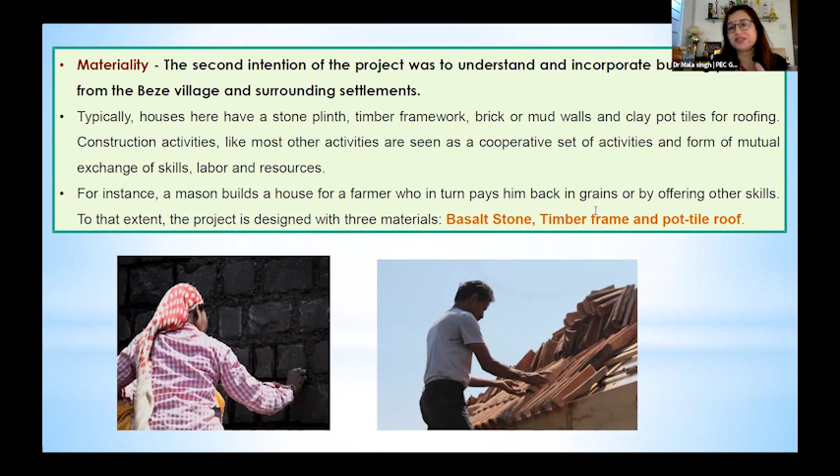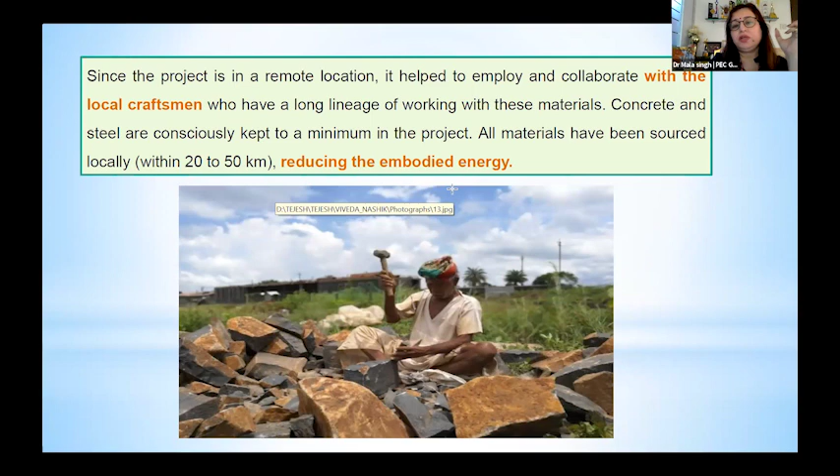Now the very striking feature of this project is that local craftsmen from the neighborhood villages were part of it, and concrete and steel were kept minimal, with mostly local products used in the construction of this property.

This entire stonework was mainly carried out by the Vadari community in that area, whose rural economy depends on this trade. They have stone measurement experts, and these people were given the opportunity to build this project and to supply the basalt stone materials as well.

This is what the sustainability concept is about: self-sufficiency. When you buy local and give opportunity to local people, it makes the project more monolithic in character, since the material used is monolithic itself and inspired by ancient heritage structures.

As one of the earlier speakers mentioned upcycled wood, the same concept was used in constructing this resort. Two kinds of wood were applied: one was upcycled wood, and the other was Haladu wood, inspired from the Haladi plant, turmeric, primarily used for the roofing system.

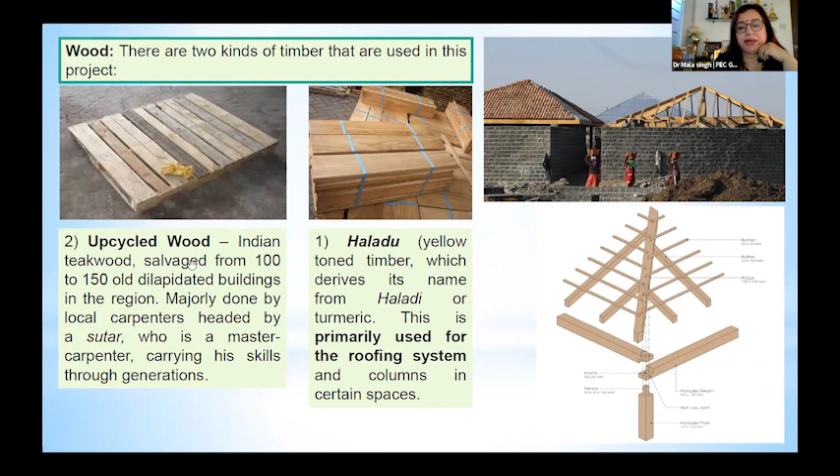The upcycled wood was salvage wood procured through the sutar, the local carpenters who head this trade. These generational skills of the people were used in this project through these two kinds of sustainable wood products.

Looking into the roofing, clay pot tiles were also used in this project. You must have heard of the kumbhar, the potter community, who use traditional methods, and the same strategy was used here.

This was the largest consignment of pot tiles from the kumbhar that this area had ever received, which helped increase the local economy and had a very good social impact. That's also about the sustainability aspect when we talk about the triple bottom line.

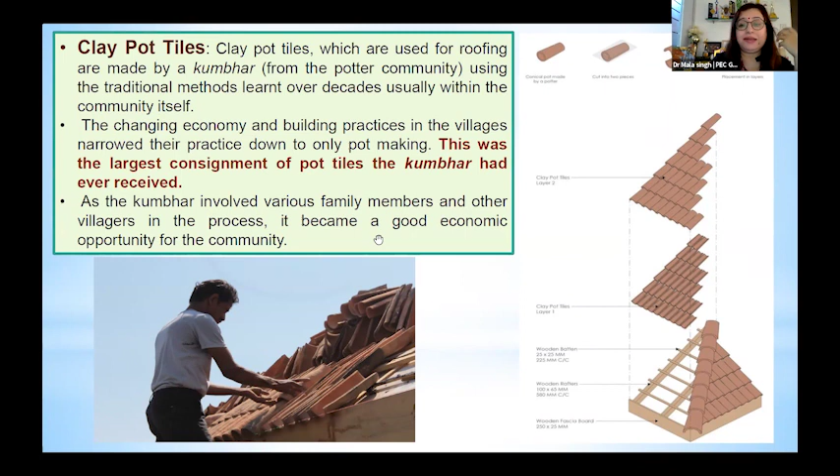Most of the kumbhar and their family members were involved in this entire process, so the project doesn't take care of only the environment and profit, but also the beneficial aspects of the social community, enhancing the local economy as an opportunity for them.

Now looking at the design specialty, it's a beautiful project. If you go there, you'll feel historical, prominent architectural types used in the design, inspired by the landscape of the Sahyadri Hills, since it is located very near them. You can see architectural traces from the Trimbakeshwar temple, and there are traditional wadas nearby that inspired it.

Now these are the real project pictures. When inspired from the wada culture, I'll show you those round clusters. Then kunds, where a lot of water bodies were created in between. Then the chaitya concept, with beautiful and tedious Buddhist caves and monasteries.

You can see in the center a dome for the meditation center. Then the ghats, where you can see a lot of amphitheaters and ghat-like structures, similar to Varanasi and other areas. These are really beautiful spaces, a mind-blowing experience when you go there.

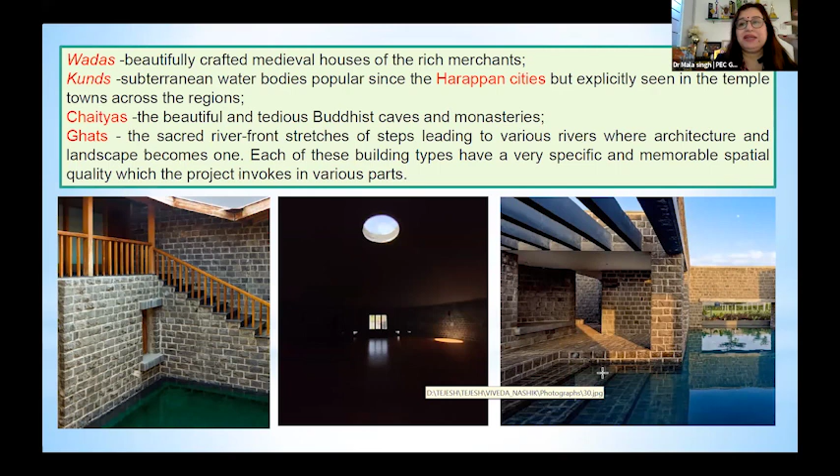Since time is constrained and my presentation is large, I won't dwell too much on the design, but I'd like to address that all the amenities blocks were designed with a five-square concept: the wada and courtyard houses, chaityas, kund, and ghats.

All these naturopathy clusters were placed accordingly: massage rooms in the courtyard houses, yoga and meditation center in the chaityas with the round dome I showed, swimming pools and other water bodies at the kund concept, and the amphitheater and restaurant as the ghats.

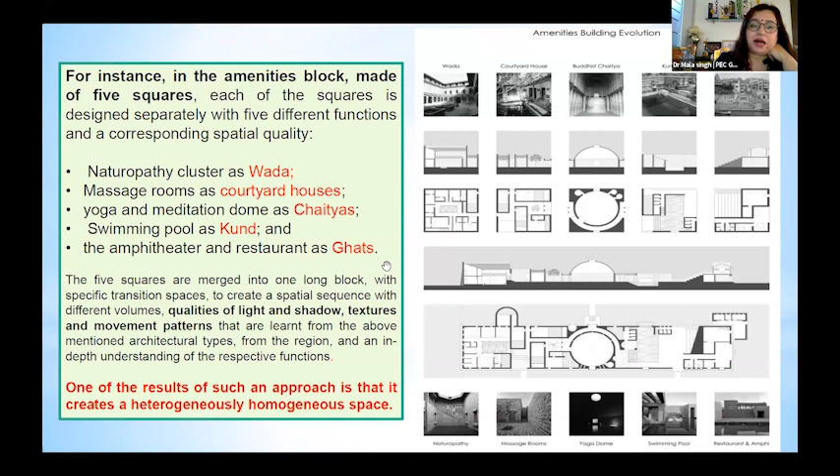This is the cluster I was talking about, mainly the guest rooms, conceived as clusters resembling a small settlement. Every cluster has a central courtyard, and you can see in the actual picture there is a tree.

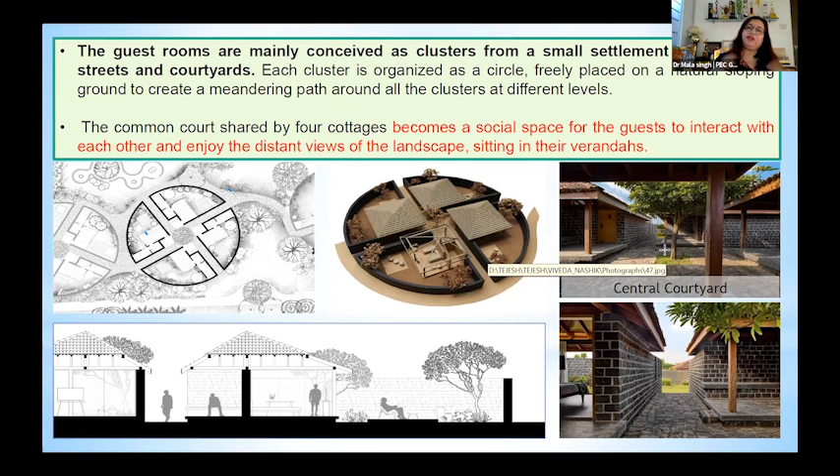If you see this particular setup, when any guest comes here and stays, he has his individual courtyard. Even this cluster also has its own individual courtyard. This is a very good community space which makes you interactive, and this gives you the inspiration of our village and local cultural values.

Now coming to the monolithic character, because we know that monolithic characters help give better views, to look into the sky, get green color views, and look into the landscape and scenic values of the project. This is what the monolithic character is helping in this project as well, just like our old forts.

If you see those 4 clusters I was talking about, these are the recreational areas where the roofing is basically pyramid shape with clay tiles. You can see the complete section, and local bamboos and clay tiles, how they were put here with a natural, personal roof garden.

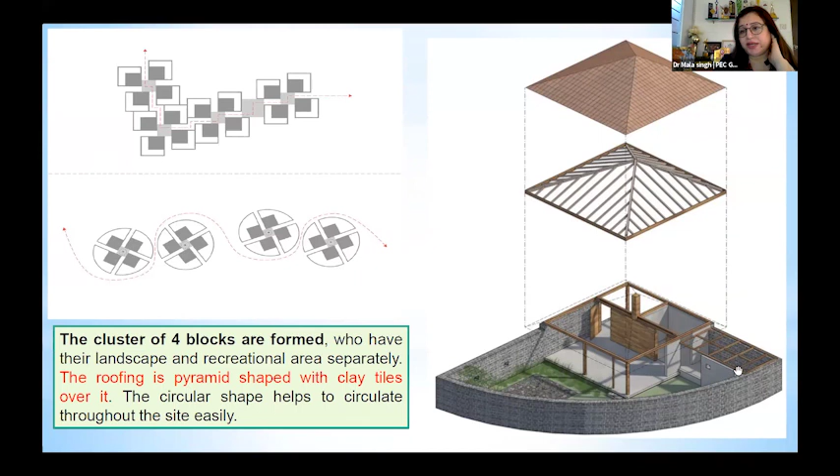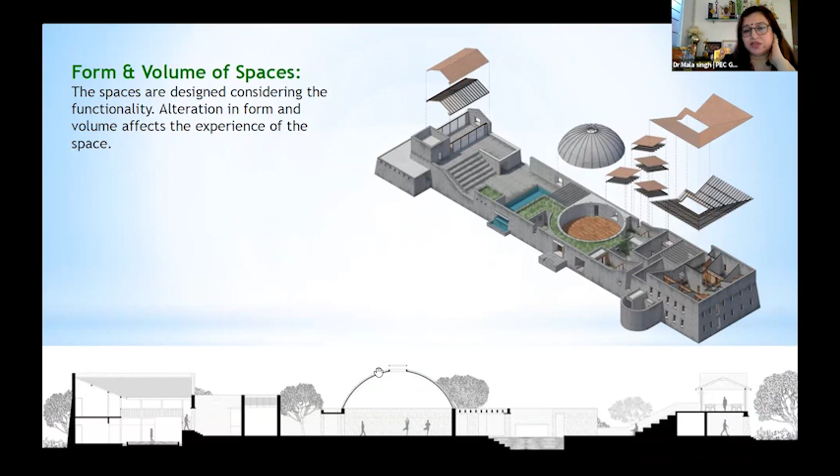And this is a toilet. We are trying to show here how the utilization of forms and volume of the spaces were utilized. You can see the section here. This is a dome, and this is how the spaces were utilized so efficiently here.

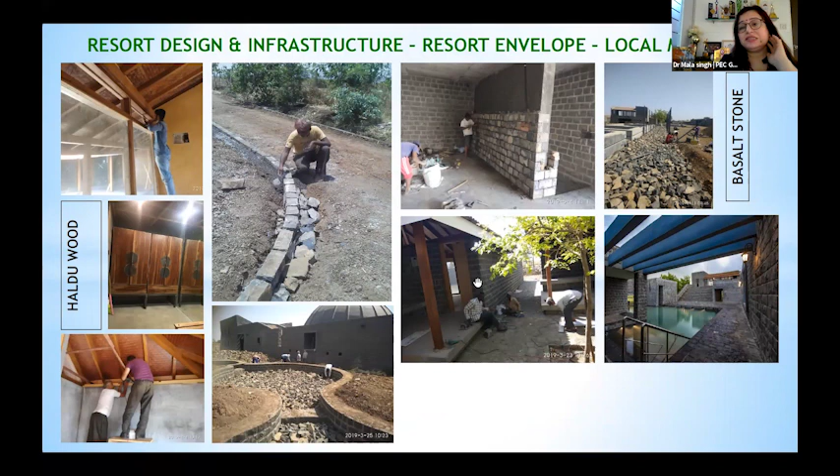So this was basically the infrastructure and the local materials used. You can see the actual pictures of the site, mostly the interior also, where Haldu wood was used. You can see the basalt material used, and the natural stone. This is the actual photos to justify how the construction was done.

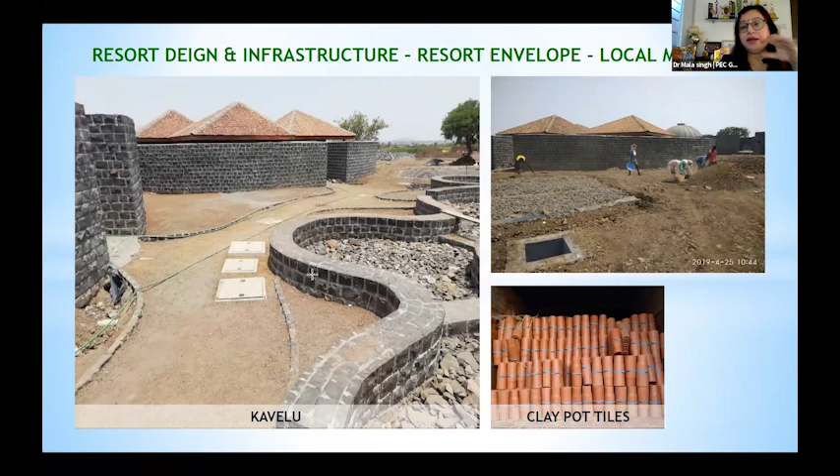And these are also some of the envelope shots of the entire resort infrastructure, showing how it was done during construction.

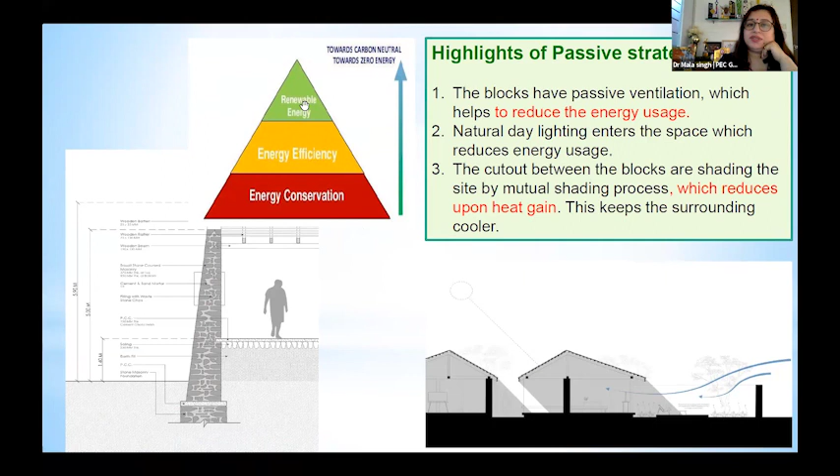So when we talked about the passive strategies, as I spoke about in my panel discussion earlier, this acts as a pyramid. When we talk about energy conservation, it's through passive strategies, energy efficiency through 5-star rated or energy efficient equipment, then renewable energy through on-site and off-site green energy applications. The same was used here.

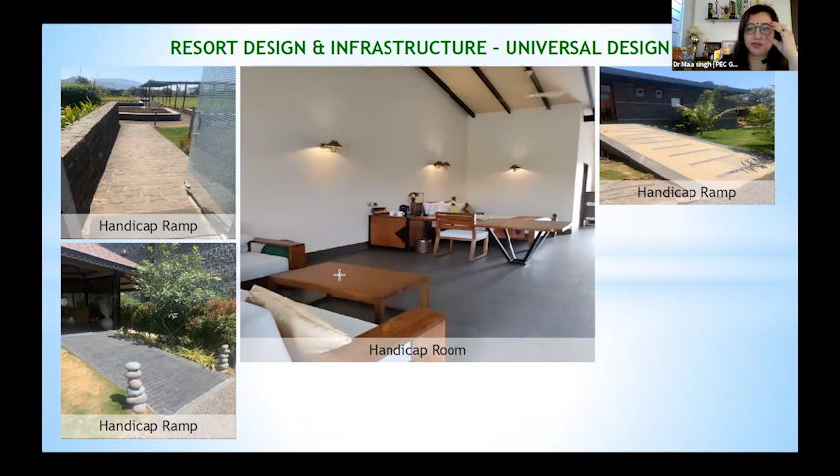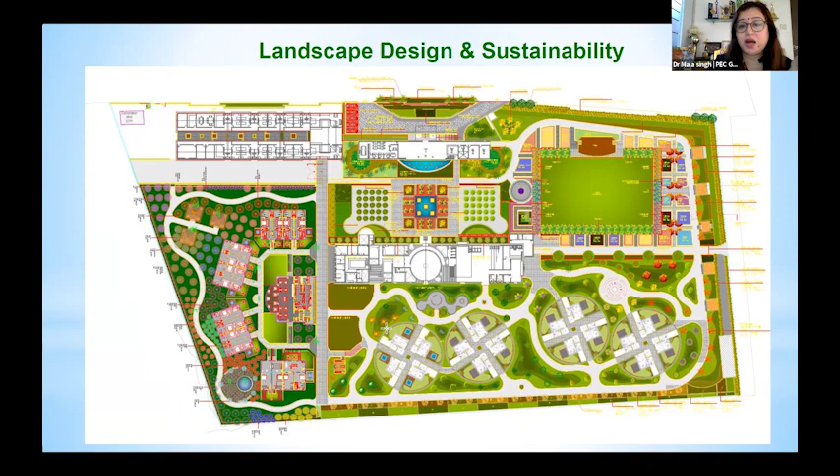Here you can see a lot of pergolas, all shaded paths, and let me tell you, more than 90% of the places here are natural pervious areas. There is no hard concrete. The percolation power of the soil here is so powerful that the entire land works as a natural aquifer, soaking the rainwater naturally, because you don't have much hardscape area here except the building footprint.

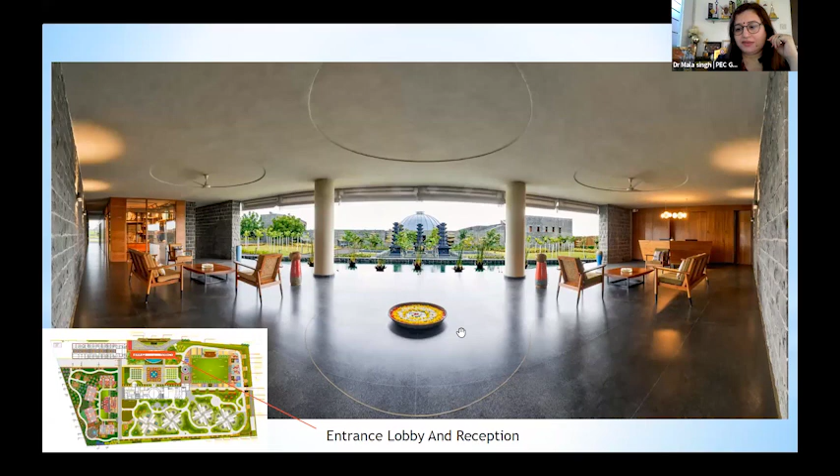So this is just a view of the project in the evening. Again, I'm showing you that panoramic view of the entry reception, how it looks with the landscape area elements and all the amenities. There are very specific themeful gardens like botanical gardens.

Then we have organic vegetable gardens, medicinal gardens, and all the food. The raw material for the food is also just taken from their own gardens, so they don't need any outside food or outside raw material here. You can see some of the pictures.

So these are some of the health amenities inside, like your spa, generally because it's a health and wellness retreat. So you have these kind of spaces here which act as a natural acupressure and give you health benefits. This is that dome I was talking about, where the yoga and meditation center is.

These are the pergolas I was talking about in the landscape plan I've shown you, and these are the flower beds, which are an integral part of the reed bed system. I'll show you the reed bed system and how it works.

This is another picture, you can see how beautiful the spaces are designed here. This is the toilet, actually, the closer picture of that toilet now. You can see the landscape inside the toilet.

The best part is you have a green education aspect also here. Each and every plant has been identified with a name, so whenever the guest comes, they also understand the benefit of this particular plant. And there are regular programs they conduct here for the guests also.

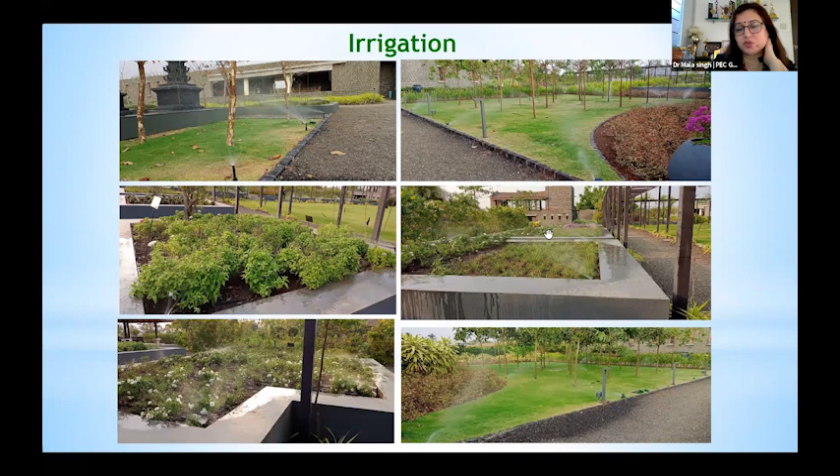you don't need too much water here. So this is the irrigation plan which was done, and this is the water management. I'll show you in short, I'll give you a brief.

The entire land, because more than 80% is landscape here which are softscapes, so hardscapes and building footprints are very less. So your runoff during rain is very less when we calculated that. So the entire catchment, the entire runoff is being captured through the weep holes in a natural well here, and that entire water is used through the WTP plant for hotel facilities.

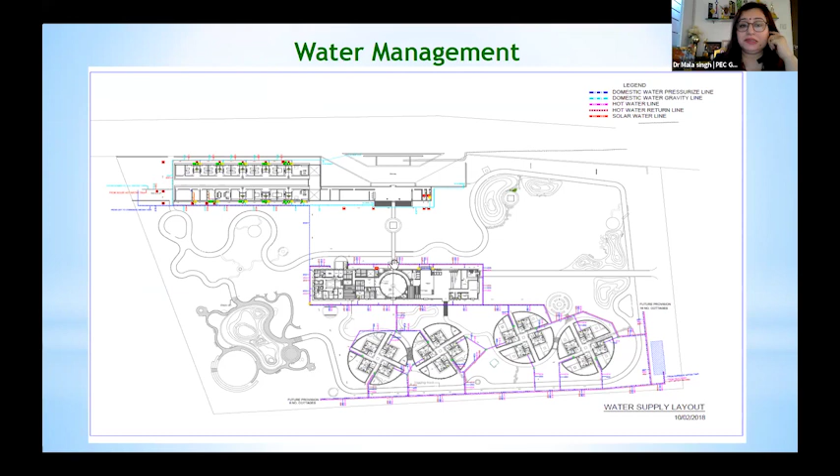So no municipal corporation water is required. It is just, as rightly said by Neeraj also, Neeraj showed you his projects, the same strategy is here. But another additional benefit in this project is the reed bed system, which I'll show you.

So these are just the filtration system for the rainwater harvesting here. This is the well I was talking about, we collect the entire rainy season water, this is always full, and in the non-rainy season we use this water itself.

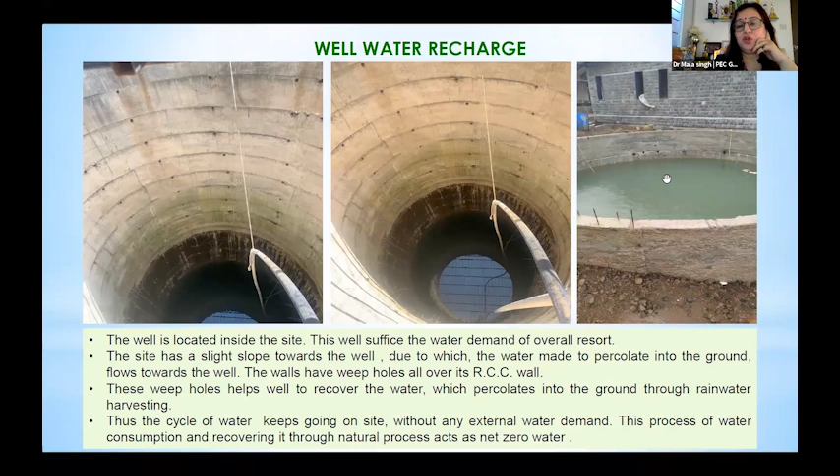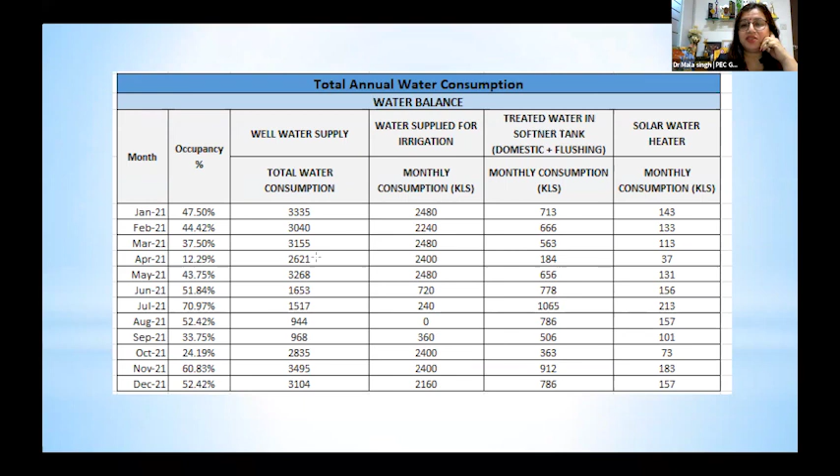So these are the metering systems, and this is what we do - the quantitative assessment, monthly, of the complete water balance in this project. And this is the reed bed system drawing actually. So here basically 11 reed beds were designed with the capacity of 60,000 liters of water to be treated from the toilets and wastewater streams, which goes into the reed bed system. That means you don't require a mechanical STP in this project.

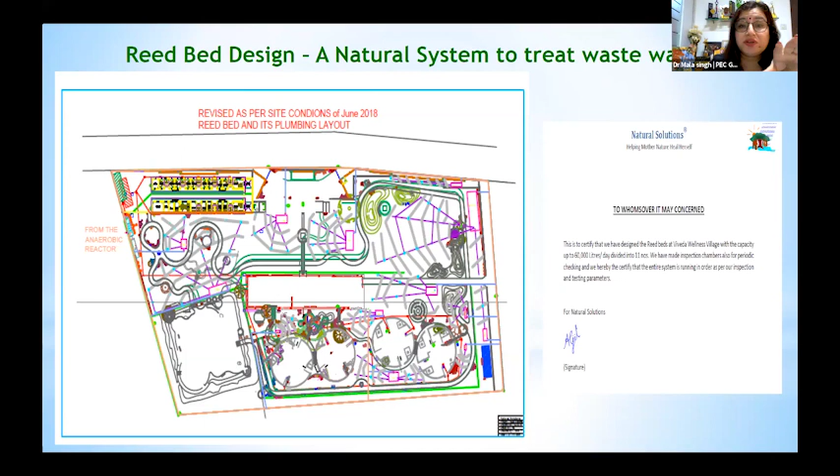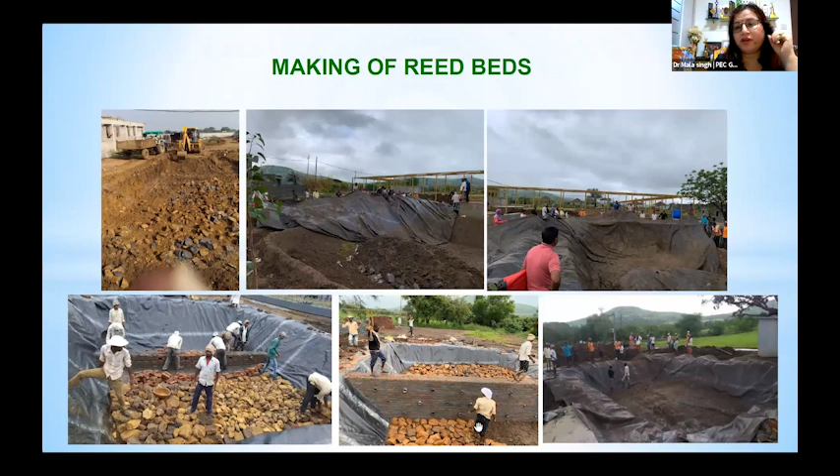And this is during reed bed system construction, you can see some of the photographs, you can have a look at how the progress, how the work was done. So this is the reed bed system. You can see, because this is a case study that I'm showing you, every component of this.

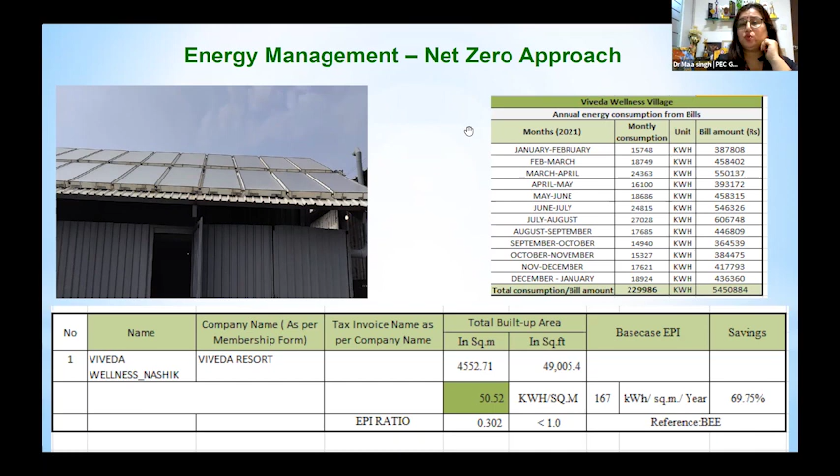So these are, I will not go into detail because there's a lot of things. And the green housekeeping in hospitality is a very important component. All the chemicals they use in day-to-day operations are certified, they don't use any chemical-based housekeeping materials here.

Then this is the waste management plan. You can also see how the centralized waste management system is being done here, how it is being collected, then segregated.